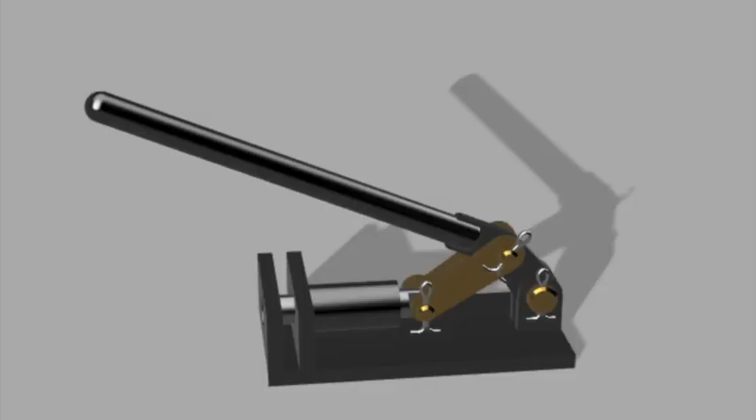Hi, in this series of video demonstrations we're going to be using Fusion 360 to create moving models of our mechanical design ideas. In this first video we're going to be looking at extruding simple geometric shapes from sketches. To help us demonstrate this, over the series we're going to be modelling this punch mechanism, starting in this video by modelling the base plate the other components are attached to.

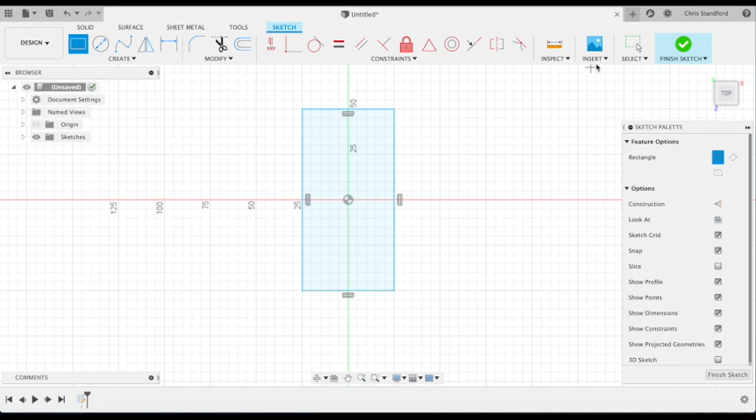The base of our base plate will be a simple rectangle, so we're going to click on Sketch and select the XZ plane and then use the rectangle tool to draw a rectangle of 100mm by 50mm. We can use the grid in the background to help us. Once we're happy with the sketch, we can finish sketch and we can extrude that using the extrude tool, and we can drag that up by 5mm. Double check it says 5mm and new body and then click OK.

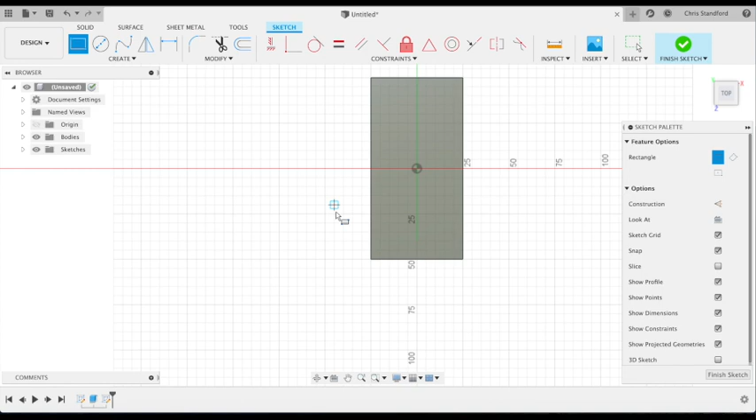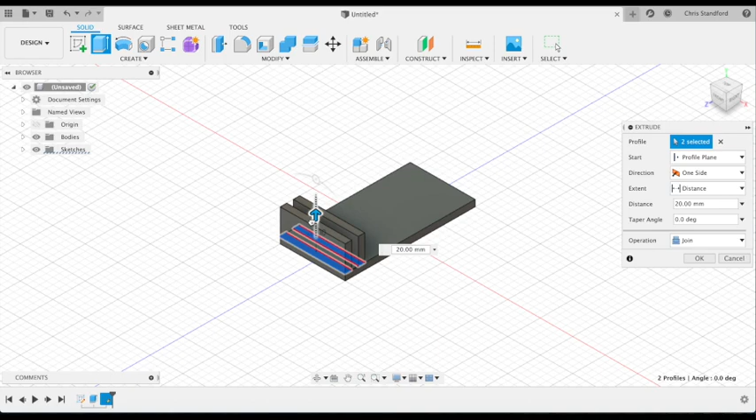We can then click on Sketch and select the top surface of the base plate to sketch the other elements to be extruded from the top of that plate. I'm going to use the grid to draw some lines that are 5mm apart, and then I can finish sketch and extrude two of those rectangles up by 20mm. It says join there, so that's fine. I want it to join to the existing component, the existing body.

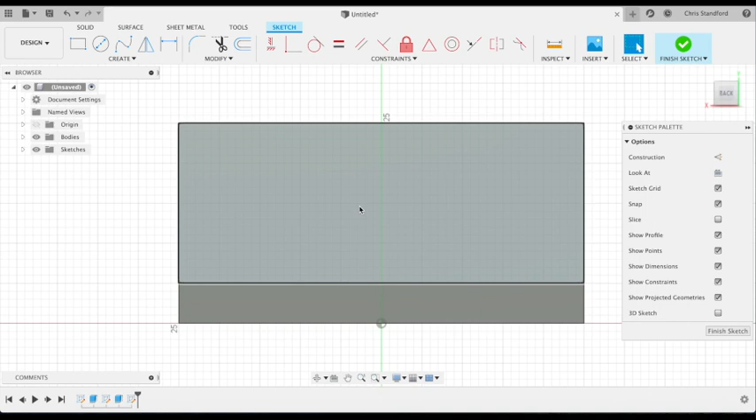Our next element is going to be a cylinder, a tube that extrudes off of this face here. So we're going to draw a sketch on that face. Start with a circle, 10mm in diameter, from the center of that rectangle, and then an external part of the tube that's going to be 16mm in diameter. I'm then going to have a little flange that joins that to the plate, the surface of the plate. We can get rid of those excess lines.

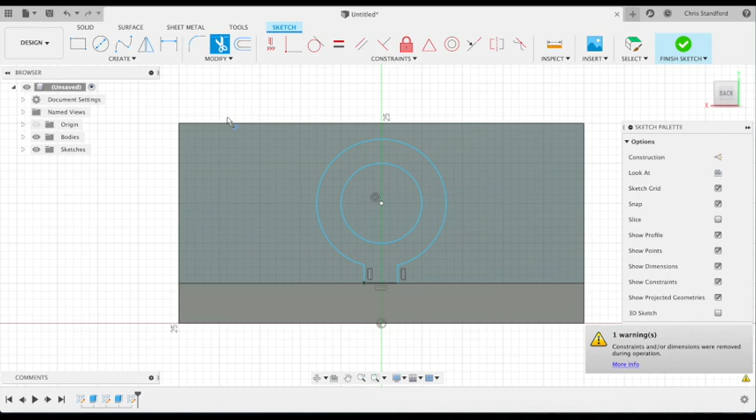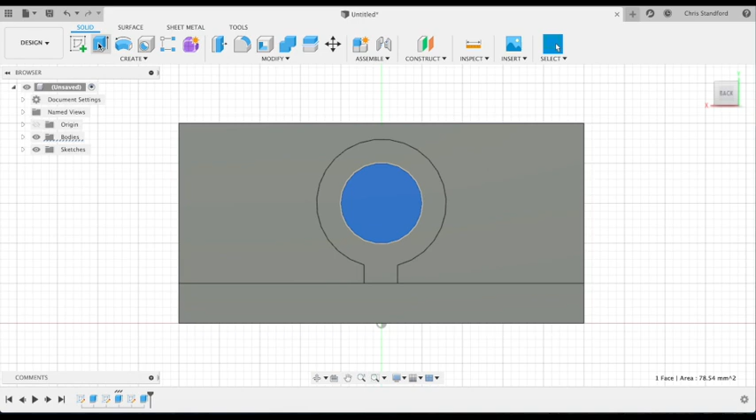And then I can extrude that perpendicular to the face. At 30mm, making sure it joins to the existing body. So that's all one body there now, no separate parts. Next I'm going to extrude the circle at the end of the inside of that tube through. So we're going to go to a -5, so it goes through the plate that is in front of it.

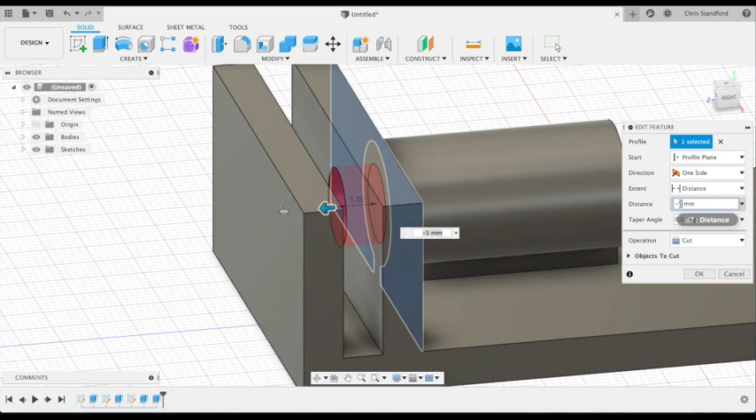So if we rotate it now, we can see that it has extruded through that first plate, but I want it to extrude through both plates. So if I right click on the extrude icon on the timeline at the bottom, I can click edit and I can change that now to -15. It will now extrude its way through both of those rather than just the first one. So I've got a hole now that goes all the way through that tube and through both uprights on the plate.

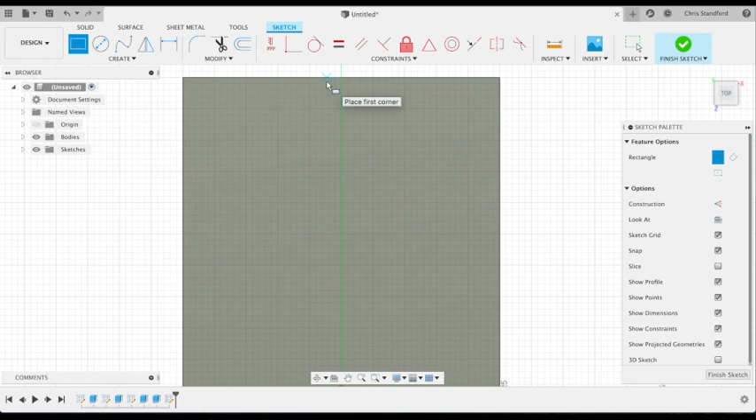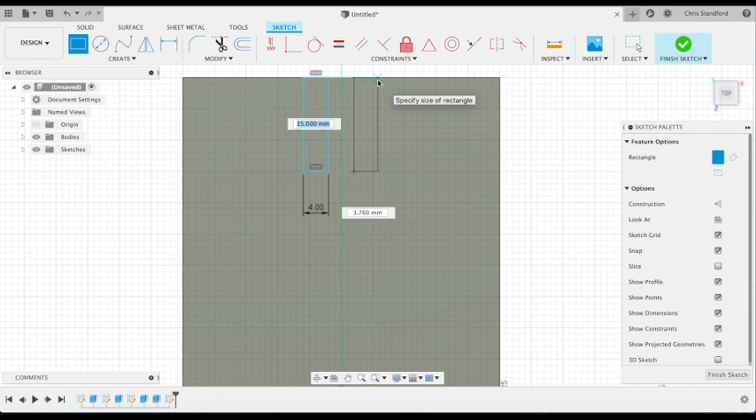Next we're going to include two more uprights onto that face. We're going to zoom in so I can use the more accurate grid. And I'm going to draw 2mm away from the center. I'm going to draw a 15mm by 4mm rectangle. The reason it's 2mm from the center is I can then have a 4mm gap between those two plates as well, those two uprights. So 15 by 4, 15 by 4, we're going to extrude those up.

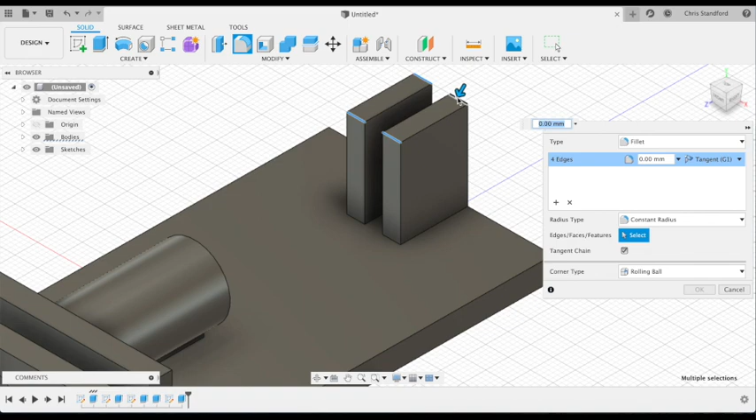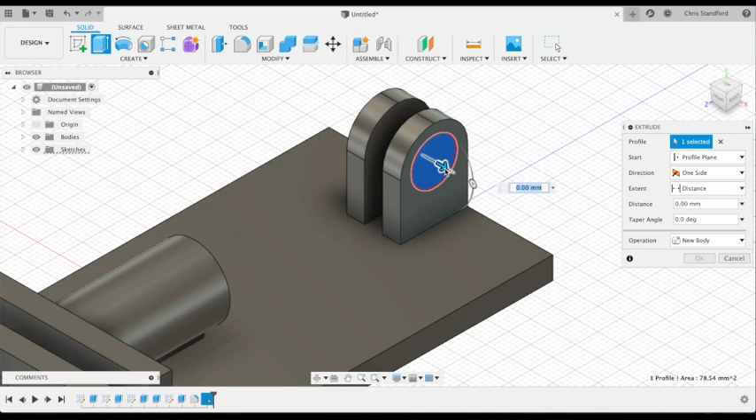I can then extrude those rectangles up by 20mm, again joining the existing body, so it's part of the same plate so far. And then I'm going to add a fillet in, or a radius in, on those four edges. It's 7.5mm because they're 15mm wide, so you get a full semicircle then. Next I'm going to add a hole into the center of that at 10mm diameter, and then extrude that all the way through so it cuts through both.

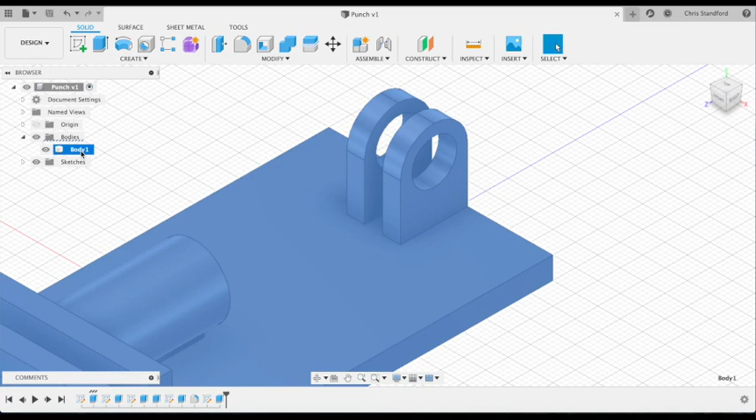So there we have our finished base plate. Before we go any further, I'm going to save that file so I don't lose any work. I want my body to have the property of steel, so I'm just going to check that that's the case. It normally is, as a standard, which it is, so that's perfect.